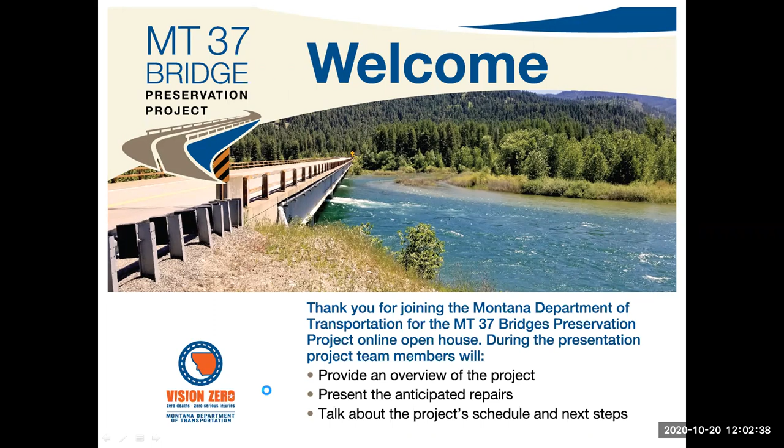Good afternoon, everyone, and thank you for joining us today. Sorry that we can't be holding this meeting in person. I would much prefer to be meeting people face to face, but in today's times, this is the second best thing, or the best thing we can come up with to be able to share information about this project with you. So as Brandon had said, my name is Bob Vosen. I'm the district administrator for the Montana Department of Transportation's Missoula District, which is generally Western Montana. I've got an office in Missoula and one in Kalispell.

With me today, I believe we've got a couple other members of the MDT team. So if I could get them to introduce themselves. Terry, are you here today? Yes, I am. This is Terry Voller. I also work for MDT in the Helena main office. My basic function on this project is to work to administer the contract with Forsgren and RBCI, and to basically be the liaison between those two consultants and MDT.

All right, and one other member of the team that's not here today is Jacqueline Smith. She is the Missoula District Pre-Construction Engineer. So if you do have questions in the future that you send in, you may get a response from Jacqueline as well. So with that, I'll continue on with our presentation.

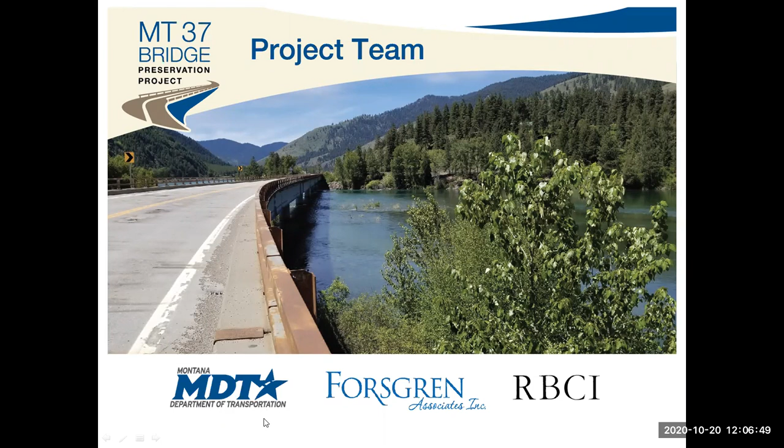Now, if we can move on to the next slide, please. A little bit about the project: MDT was in the early stages of evaluating the bridges shown on the screen here. Most of these bridges were built in the 70s as part of the Lake Koocanusa Dam project. Some of the lower bridges were built in the late 50s. These bridges have been in place and served the citizens of Montana very well.

But they're aging, and we need to do some routine upkeep, and some of it's a bit more substantial. I want to stress that these bridges are all still safe to drive on, but we want to get out there, identify the repairs that need to be made, and what we need to do to keep them functional and obtain as much service life as possible, to get the best bang for the taxpayers' dollars. There's a couple different things we're going to be doing to these bridges that the team will be describing later.

At this point, you can view it as routine maintenance on your car. We've got a couple levels. Some of these bridges are due for an oil change, if you will, while others are more in need of that 100,000-mile service, which is a little bit more substantial. But again, the bridges will continue to serve us well if we provide some of the heavy maintenance to them.

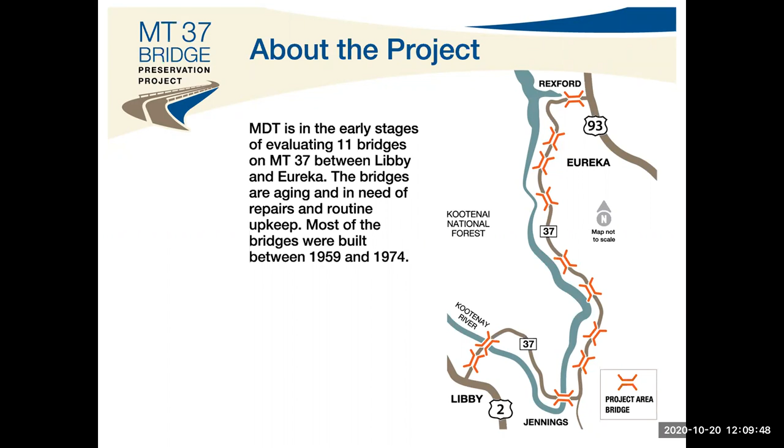It was decided to organize the project schedule and process into a two-phase approach: an evaluation phase and a design phase. The evaluation phase started earlier this year and included office and field evaluations of each bridge. All of the information was carefully considered to develop repair and rehabilitation needs and was documented in a draft bridge report. The intent of this public meeting is to share the findings and recommendations in the draft report with the public and request public comments.

The next step will be to finalize the bridge evaluation report. In the final report, there'll be a section that documents public comments from today and discusses any items that MDT should consider during the design process.

The design phase is anticipated to start in the beginning of 2021 and is anticipated to be completed later that year. In the design phase, the construction plans will be developed. The design phase will also include an opportunity for public comment prior to the final design later in 2021. The current schedule suggests the earliest construction could occur in 2022. However, the funding for this project is not available in 2022, so it's more likely construction will occur sometime after 2022 when funding becomes available.

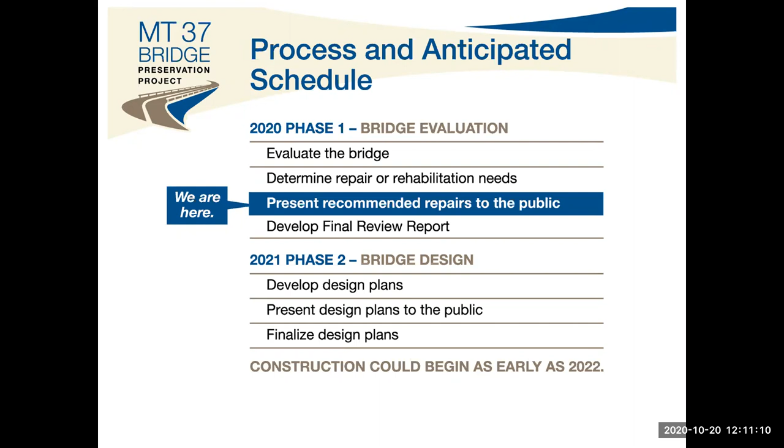While I still have the stage, I also wanted to touch briefly on MDT's Bridge Bureau organization and the services we provide. The MDT Bridge Bureau is tasked with keeping Montana's bridges safe, resilient, economical, and reliable. Similar to this project's two-phase development approach, the Bridge Bureau is organized in two sections: the Bridge Management section and the Bridge Design section. MDT's Bridge Management section provides condition inspection and load rating evaluation for the 5,000-plus bridges across the state.

The Bridge Management section also evaluates and analyzes overweight permit loads and performs bridge maintenance on state-owned bridges. MDT's Bridge Design section provides design and engineering management on bridge replacement, rehabilitation, and preservation projects. It also establishes and maintains design criteria and standards, participates in research projects, and promotes design initiatives to improve bridge performance and value.

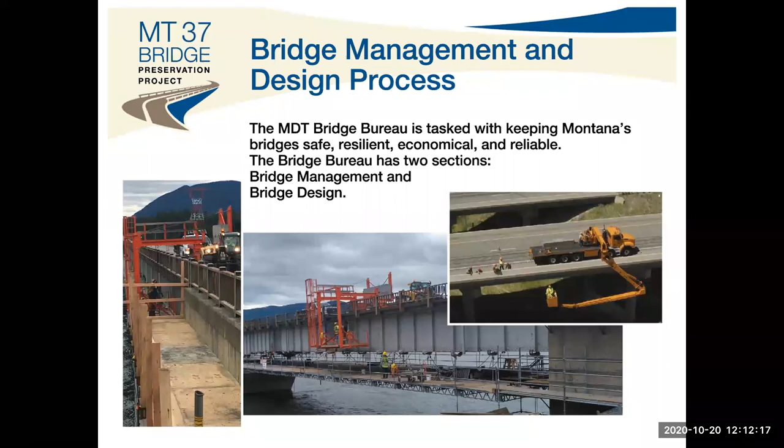Our firm was tasked with performing field visits to each of the 11 bridges on Montana 37, reviewing that field data along with other data provided by MDT, and then determining whether the bridges needed a patch and overlay or a full deck replacement type of repair. We are then tasked with preparing the plans package for the work to be done by a contractor.

As part of the field work, our team not only looked at the bridges, but the needed traffic control to perform the repair work and the potential environmental impacts, and if guardrail at the bridge ends need to be repaired or replaced for safety purposes. I want to describe the work involved with the two main repair types I just mentioned.

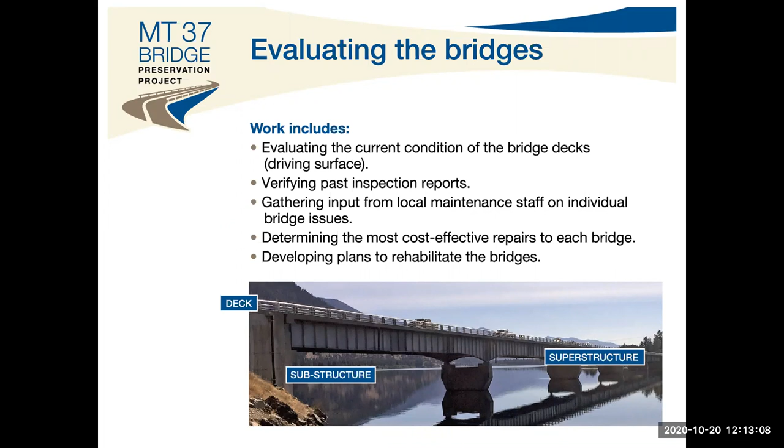So as we go to the next slide, we're going to talk about patch and overlay. A patch and overlay type of repair involves removing unsound concrete or concrete that is saturated with high levels of de-icing salt, which will eventually cause deterioration. We then patch needed areas and provide a concrete overlay on the entire deck area.

We anticipate this type of work will be performed one half at a time. So work will occur on one half while traffic uses the other half. We'll have that traffic control in place to regulate traffic going across the bridge as it'll be a single lane. And our traffic control engineer is going to go over the traffic control in a few moments.

They include the bridge in Libby over the BNSF Railroad, another bridge in Libby over the Kootenai River, a bridge over the Kootenai River near the Fisher River, a bridge over 5 Mile Creek, and a bridge over Sutton Creek.

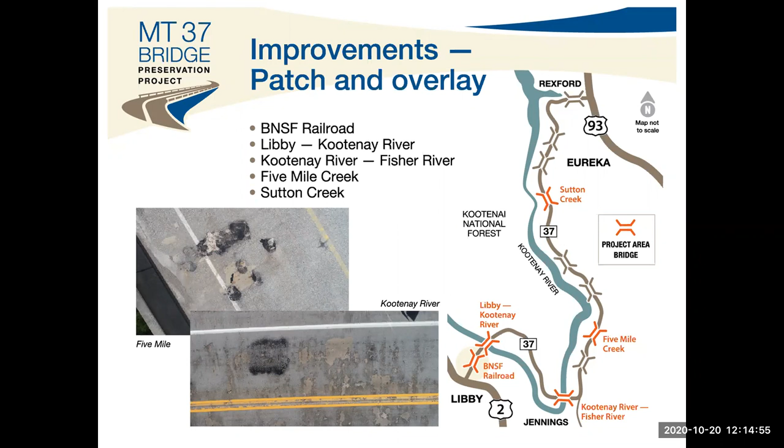We also found the need for bridge rails to be upgraded in some instances for safety purposes.

So now as we go to the next slide, we're going to talk about those bridges that need a full deck replacement. And a deck replacement is, just like it sounds, a complete removal of the bridge deck and then replacing it with a new reinforced concrete deck.

We also anticipate this work for the deck replacements will be performed one half at a time, just like I described for the patch and overlay. So work will be on one half while traffic is on the other half. And again, our traffic control engineer, Adam Bass, will talk about that shortly.

Since we'll be removing the entire deck, the existing bridge railing will also be removed with it, and the new deck will have new bridge rail that's up to current safety standards. So with that, I'm going to turn this over to Adam Bass to discuss the traffic control.

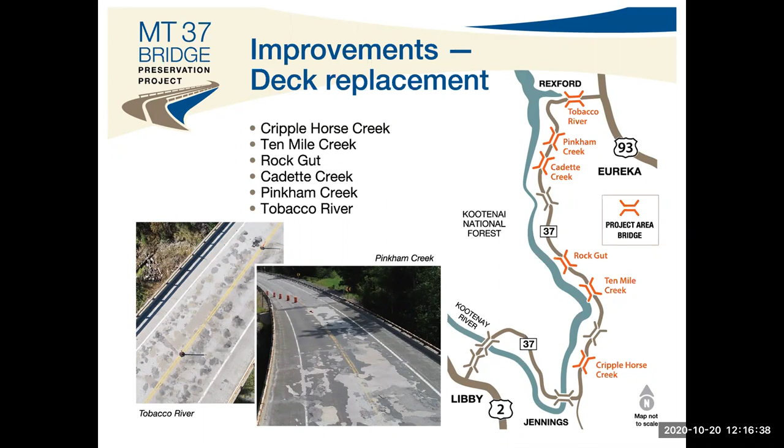Thank you, Brent. I'm Adam Bass with Forsgren Associates, and I am going to go over the traffic control layout for all the bridges along Montana 37.

The project team anticipates that traffic during construction for all the bridges along Montana 37 will be controlled using a 2-way single lane traffic configuration that will close one lane at a time. This will allow vehicles to use one lane while construction operations are conducted within the other lane. Temporary traffic signals will be placed a distance from the work zone to safely allow movement of vehicles through the construction zone during operations.

To help reduce delays, the project team may choose to complete the bridge repairs over multiple construction seasons. This will limit the number of bridges under construction at a given time.

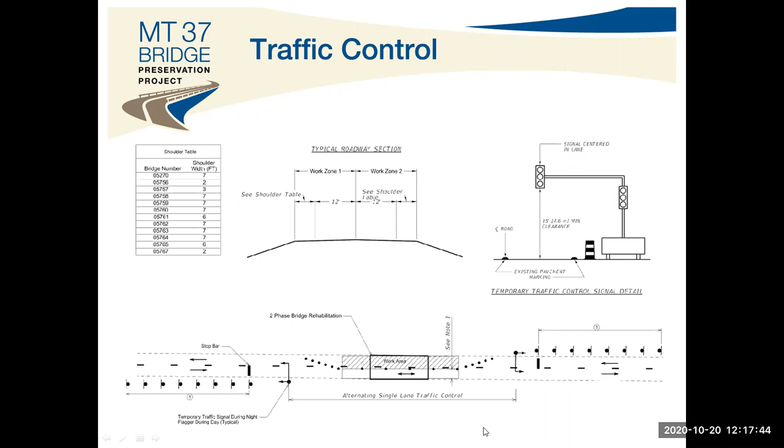The bridges near Libby are close enough together that we anticipate working on them at the same time. These bridges are over the BNSF rail line and the Kootenai River, and we anticipate working on them simultaneously to reduce impacts to traffic.

Access to Riverfront Park and Thomas Street will be open throughout construction. Pedestrians will have all current access maintained with the use of a temporary crosswalk located on the north side of the Kootenai River.

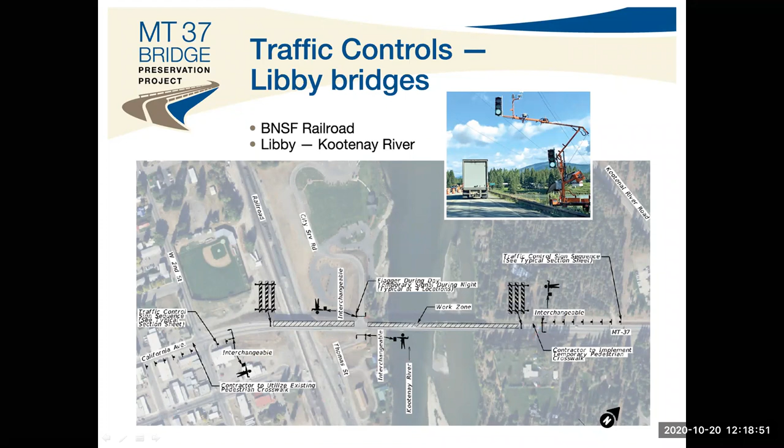So with that, that concludes the temporary traffic control section of this presentation, and I'd like to turn it over to Pat Wickman to discuss the environmental considerations.

Thank you, Adam. As part of all MDT construction projects, MDT is required to prepare an environmental study to document the effects of the action on the social, economic, and natural environment. Guidance and rules for this come under MEPA, the Montana Environmental Policy Act, and NEPA, the National Environmental Policy Act.

NEPA is triggered when there are federal funds from the Federal Highway Administration, which may be the case for this project. The size and scope of those effects, that is the significance of impact of the proposed action, dictates the type and magnitude of the environmental document or study that is prepared.

For these bridge projects, MDT has had Forsgren conduct a site investigation of each bridge to look for potential environmental concerns and document the environmental baseline at each site. We looked at nearby waters, wetlands, river users, bird nests present on the bridges, potential environmental contamination, the ability for wildlife to cross underneath each bridge, as well as staging areas.

This information is summarized in a report soon to be released by MDT. From that review, it showed that no bridge had concerns serious enough for us to assume the project could not be reviewed and permitted with an environmental study known as a categorical exclusion.

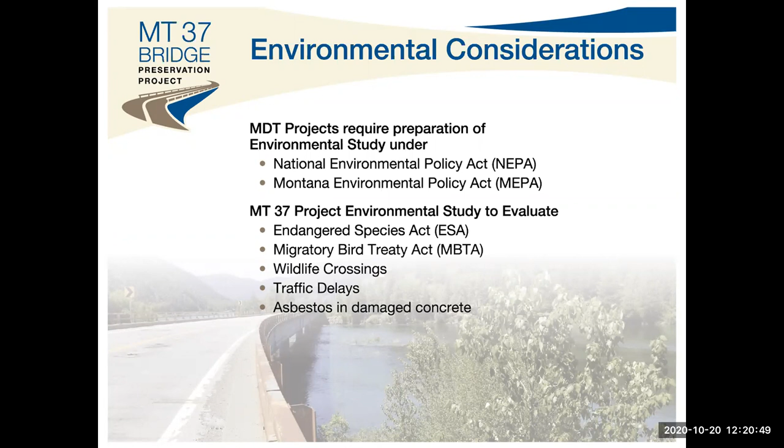So to talk more in depth about the public outreach process, I'll turn it over to Brandon. Thank you.

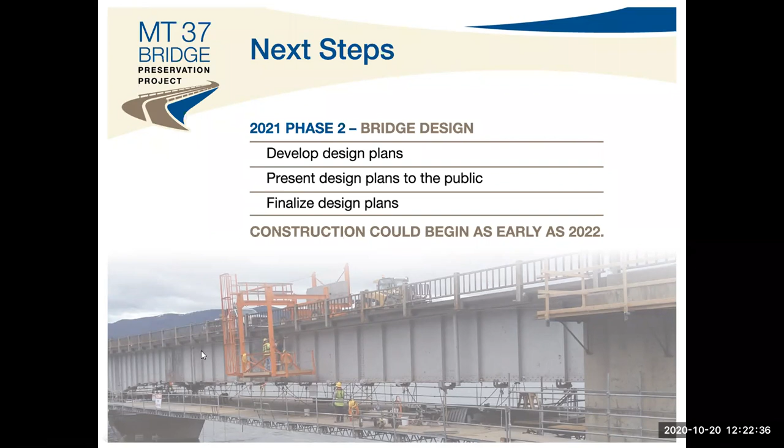I spoke a little bit earlier about an online survey, and this is where you can access it through the project website. If you have any friends or neighbors who were unable to participate in the online meeting session, you can direct them to the project website where they can view the recording of this presentation and then take the online survey.

The survey includes questions about how to best communicate project information with you now and during construction, and you can submit that survey until November 1st.